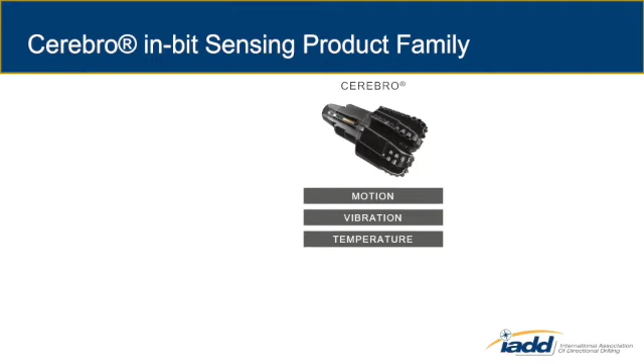Many of you are familiar with our Cerebro in-bit sensor. Cerebro measures motion, vibration, and downhole temperature, and has been in the market since late 2018. We recently publicly released our newest offering, which is called Cerebro Force. Cerebro Force has all the same measurement capabilities as Cerebro, but also adds in pressure and strain sensing, which enables us to measure downhole weight, torque, and bending directly at the bit.

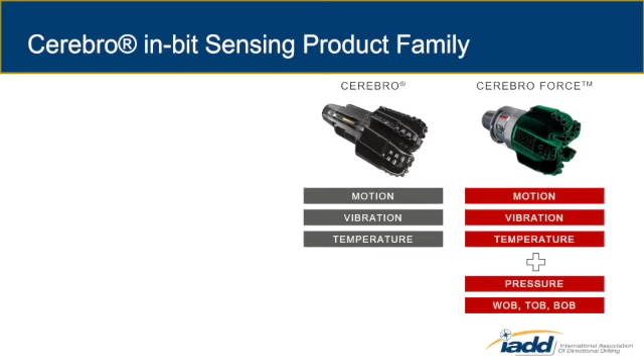Since the original release of Cerebro, downhole force measurement has been one of the most frequently requested feature additions by our customers. So we're very pleased to be able to offer this now. From the measurements that we take with Cerebro, we have a wide variety of calculated outputs. And so, when we're looking to optimize a drilling application, the most crucial step is to ensure you're solving the correct problem to begin with.

Traditional dull analysis coupled with rig surface data has gotten us a long way, but it has limitations. Our downhole measurements allow us to accurately detect and quantify all the major drilling dysfunctions that can inhibit performance. These include the classical dysfunctions such as vibration, whirl, and stick slip. But with the application of gyros and other sensors, we can see things such as bit wobble.

We can use frequency spectrograms to now analyze the vibration frequencies that we're having downhole, and look at things like enhanced depth of cut and enhanced MSE, which are enhanced for having the actual measurement of the bit speed in those measurements. Since Cerebro Force can accurately measure weight, torque, and bending at the bit, it can tell you a lot about bit cutting efficiency, weight transfer, and motor performance. And of course, with those downhole sensors, we can calculate an MSE that eliminates all of the measurement uncertainty from wellbore friction along the length of the wellbore.

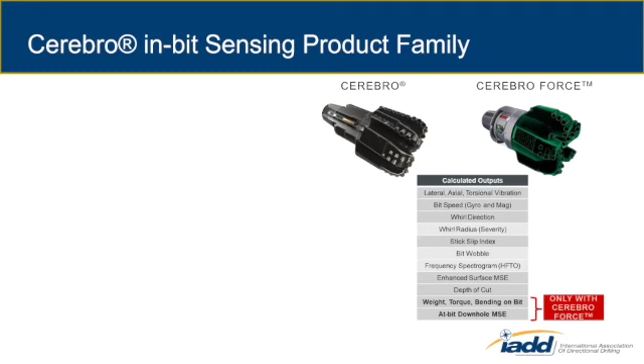Both Cerebro and Cerebro Force are fully integrated sensors offered by Halliburton in our drill bits and XR reamers. One of the distinguishing characteristics for our in-bit solution is that we have the capability to record all of our sensor channels at 1,000 hertz for the duration of the run. There's other technologies out there, but often they're limited to burst data. Continually logging at high resolution for the length of the run provides hundreds of measurements per revolution of the bit downhole. And with high resolution data, we can zoom in on downhole events down to the millisecond, which I'm going to touch on a little bit later in my example.

Both systems are compatible with all BHA types, including rotary steerables, mud motors, and conventional iron assemblies. It is standalone and it's memory only, so it also means you can run with any measurement while drilling system or none at all, if that were the case. It doesn't require any human interaction at the well site, which, especially today with COVID, is a nice feature. And it automatically turns on once drilling commences after the bit's been made up.

We have a lot of unique analysis that we perform as a drill bit product line, but when we're running a BHA with Sperry, we also have the ability to merge our Cerebro data inside of Insite software and create logs and other visualizations that integrate the Cerebro at-bit data with the downhole measurements provided by Sperry.

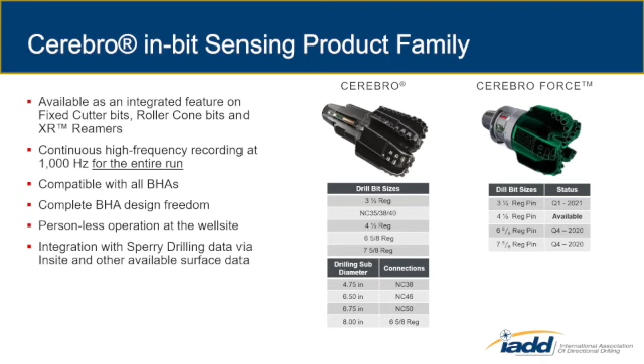And as I mentioned earlier, Cerebro Force was recently launched. The launch size is the 4.5 regular connection, so sizes between 7 7/8 up to 8 3/4 inch hole. And we're working to expand both smaller and larger connection sizes to get the full range of applications like we have with the original Cerebro. So look for some more information on that near the end of this year and the beginning of next.

Just to look at our experience, exact numbers on Cerebro and its competing products are pretty difficult to come by since it's a sub-market of the drill bit market. I know Mr. Hutchinson from Spears touched on that earlier today. If you're still with us, it would be fantastic to have some market data on in-bit sensing, and I hope that's something you guys can take a look at. So in the absence of having a report from a company like Spears, based upon our own market knowledge, we believe we're leading the industry in terms of the scale and scope of our adoption of in-bit sensing.

We launched Cerebro in Q4 2018, and we've amassed over 930 runs globally in 25 different countries. Most of the runs have been in North America, but we've had runs in deepwater Gulf of Mexico and Brazil, hard rock drilling in Mexico offshore, Norwegian continental shelf, mature fields in the Middle East, and so forth.

An important reason why we're able to do that is that we've been able to aggressively roll this out because every bit run is owned by the local drill bit design team, or our DatCI teams. We've built this capability organically within our existing drill bit technology organization. There's only a small handful of people, such as myself and a couple folks in technology, that work on Cerebro as their only full-time job. We think this is a very important distinction between other platforms and really allows us to intimately tie downhole data to drill bit design.

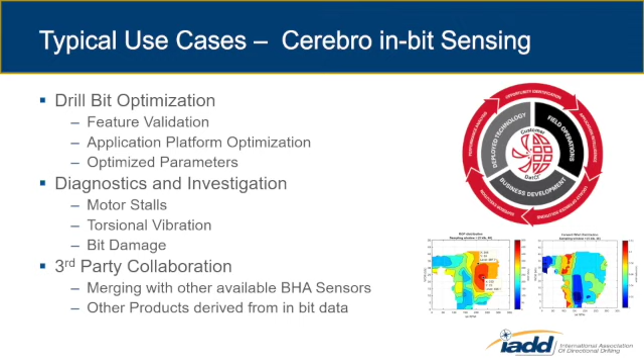And then there's other products that can be derived from in-bit data. We just heard from James at Fracture ID. They have a technology to extract pseudo logs of geomechanical properties from the exact same data we use to optimize drill bit design. In US land this year, there's not going to be a lot of sonic logs done on all the wells drilled, but every single drill bit is used to drill every foot of the well. And that's a tremendous opportunity for the industry.

So I'm going to get into the second half of my presentation and focus on an example. Because of the time allotted, I only really have time for one example, but I wanted to mention that in the following session, Seth Anderley, our Permian drill bit technology manager, is going to present a multi-well case study that highlights some more capabilities of Cerebro Force.

Gabe and Dustin, I know hopefully you're still with us. You had made some comments earlier in the start of the day that I think you'll find what Seth is going to present to be pretty interesting.

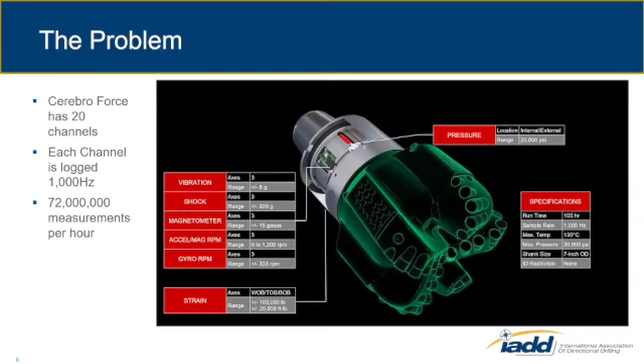So for my example today, I wanted to highlight a special capability that we have when we combine downhole force measurement, high-speed sensing, and placing it below a mud motor. To begin, I want to start with a problem statement. We're logging 72 million measurements per hour that we're drilling downhole. If you printed a post-run data set after a run, it'd be a book that's 8 million pages long. So the question is, how do you make sense of it all?

And what's the workflow? The analogy that I would like to use is, it's kind of like having a 20-camera security system in a hotel. No one goes back and attempts to watch all 20 feeds of their camera at the end of the week and hope that they see something useful. Generally there's going to be a trigger that prompts you to look at a specific moment in time. This could be a report from a guest or something an employee had seen, or a motion detector on your security system, and so forth. And so we employ a similar workflow with our downhole data.

The first thing we're going to do is look at our initial information that we have. This includes the run summary report that Cerebro can generate automatically, along with reports from the drilling rig about performance. Any one of these initial reports can prompt us to do some more analytical work where we look at Cerebro data merged with the available rig data. This is typically at a 1 Hertz frequency so that the downhole data lines up with the rig data. This is a very good level of detail to examine trends or spot points of interest.

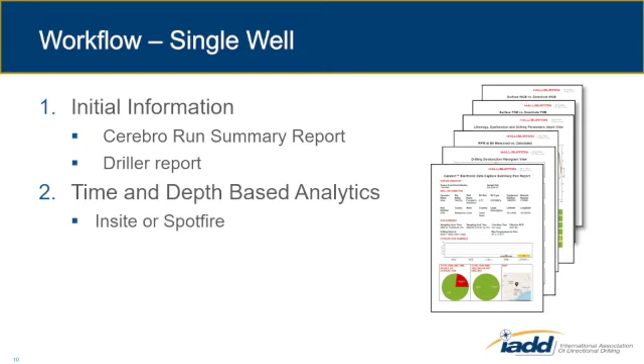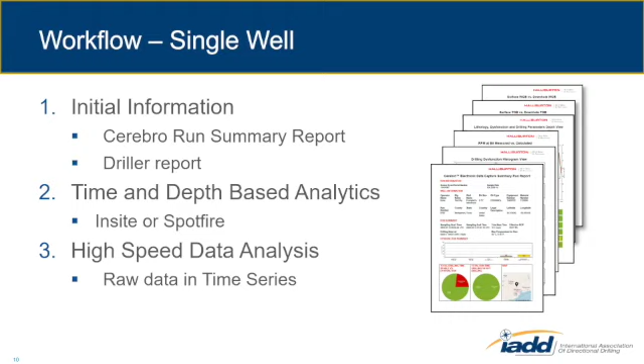From an analytical perspective, this is our workhorse level of data analysis. Many of the insights that we have can be gained at this level of detail. But occasionally there are prompts that make you take a deeper look at the data in its native state. And I'm going to give you an example of that. I know I'm running against my time, so I'll try to do it as quick as I can.

So the question is, when a motor stall happens, why? And how can we use downhole sensing to potentially indicate to us why a stall has occurred? So I have some example data I wanted to show you. We're looking at 40 seconds of downhole data at 1,000 Hertz. From top to bottom, we have bending channel, torque channel, gyro bit speed, and then finally the weight on bit channel on the bottom. We can see the bit speed drop to 0 here.

This is the start of a stall event. We can immediately see the torque climb over the course of 5 seconds to its peak value. Also, during the portion where we see the torque rising up at the top, we have the motion on the bending channel, which is the winding up of the drill pipe after the stall. You can actually count the peaks and the bending reversals here. It happens to be 4 wraps. After that occurs, we're fully stalled, and you can see the bending channel flatline along with the torque.

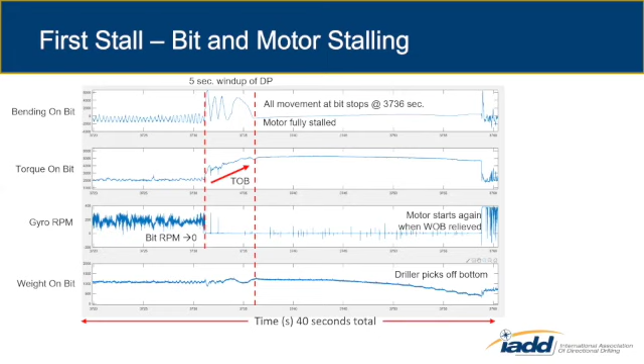There's a time delay before this stall is recognized and the driller picks up off bottom, at which point eventually the motor is relieved and it can begin to rotate again. So we're looking at 40 seconds of data. To better understand why this occurred, we're going to zoom in even further, and this is half a second of downhole data plotted. We can see that drilling proceeds normally up until about this point. Then we see a change.

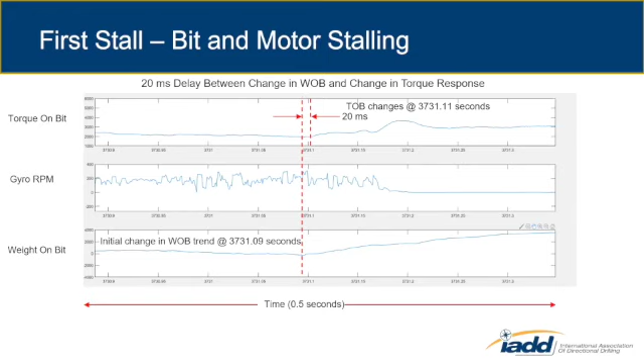We can see a change on the weight on bit channel trend here. After a short delay, we see the torque begin to respond. The important thing to note is the 20 millisecond delay between the torque and the weight on bit, which led first. As it continues to play out over the next 200 milliseconds, we can see weight on bit steadily rising and a downward trend in the RPM until we have the stall. So this would be indicative of a stall that occurs due to sudden application of weight on bit.

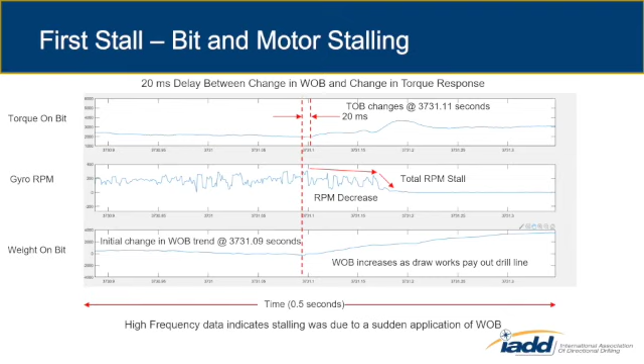A second example of a different type of stall is when you're drilling along with steady weight on bit, like we see here, and then you begin to sense a rise in the torque. The torque rises until you start to see a response in the weight on bit, which correlates with the exact same time when you have zero on the bit speed channel. And then your bit has stalled. In this type of scenario, high frequency data indicates the stalling was due to a formation change, because there was not a change on weight on bit, but we saw a very sudden spike in the torque downhole that initiated a stall.

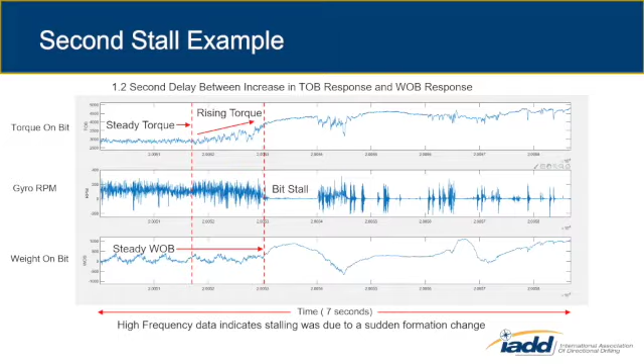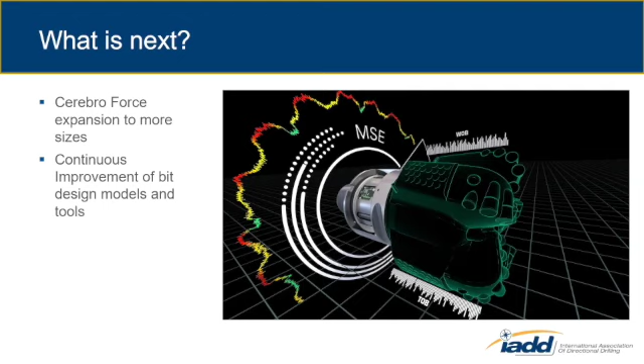So I'll close my presentation briefly to talk about what we see in the future. First and foremost, a couple trends to keep an eye on and things we want to focus on. As I mentioned, we're going to expand Cerebro Force into more sizes. Look for more information on this at the end of the year. The second is that Halliburton is going to continue to aggregate the learnings from individual runs, refine our bit models and incorporate them into our design software, iBits. This is already taking place. We're looking at the relationship of bit design features and their effects on dysfunctions and performance. And we're finding many cases where some of these relationships challenge conventional wisdom on drill bit design.

A third frontier is storing Cerebro data in large data lakes, so that all the Cerebro data can be queried on a massive scale. Today, our limit on the rollout of Cerebro is not the ability to crank out the widgets to get downhole. It's having the manpower to properly analyze all the data. And so these tools will help us in achieving an even greater scale with the rollout of the product.

And lastly, at-bit force measurement was mentioned as a commonly requested feature addition. Right alongside that is the need to have the information in real time. This is a need both internally at Halliburton and for our customers. And we're continuing to develop technology in this space to make it possible to have some of this data in real time in the near future.